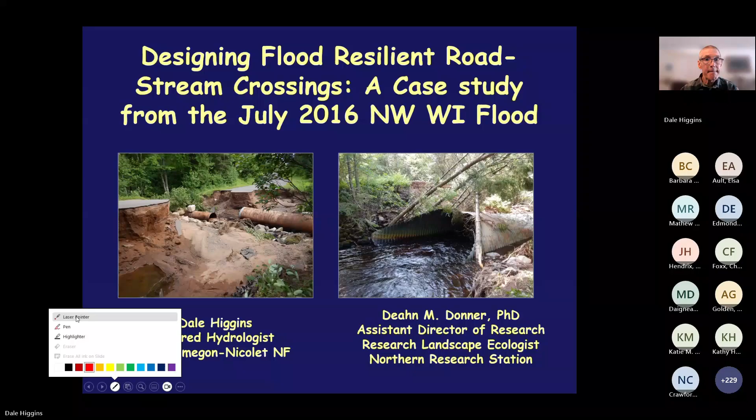Okay, so I'll get started with a little bit of background. During the flood recovery work, we were able to attain peak flood flow estimates at 26 sites. 17 of those sites were designed using the stream simulation process. Only one of those failed, although 13 overtopped. At 9 other sites where we had flood flow estimates, 5 survived and 4 failed.

The peak flood flow estimates were estimated from high water marks and then hydraulic calculations. The calculations were mostly performed using existing HEC-RAS models, which are also used to design most of the stream crossings. I'll also be talking about the flood frequencies for each of the sites, which were estimated from the 2003 U.S. Geological Survey Wisconsin regression equations.

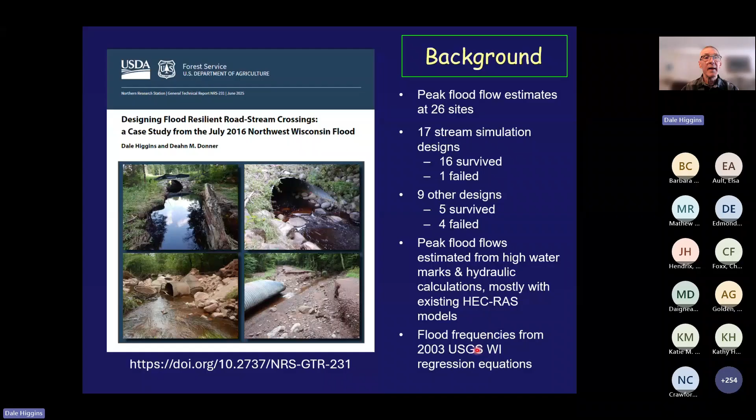And here's what Kathy showed. Here's a picture of the publication. You can download it from this website.

So the objectives today: I'd like to highlight and contrast stream simulation versus traditional culvert design, then briefly go over the results from the case study, including flood magnitudes we observed, culvert survival and failure and the lessons from that, identify how watershed characteristics affected flood response and the implications that has for future flood flows, and then apply all those lessons to designing more flood resilient culverts.

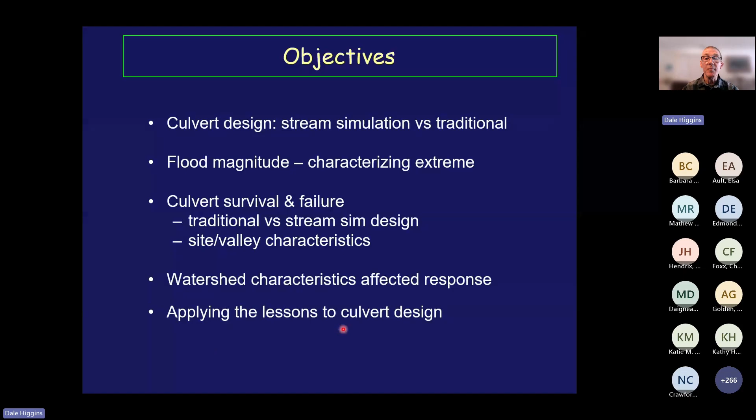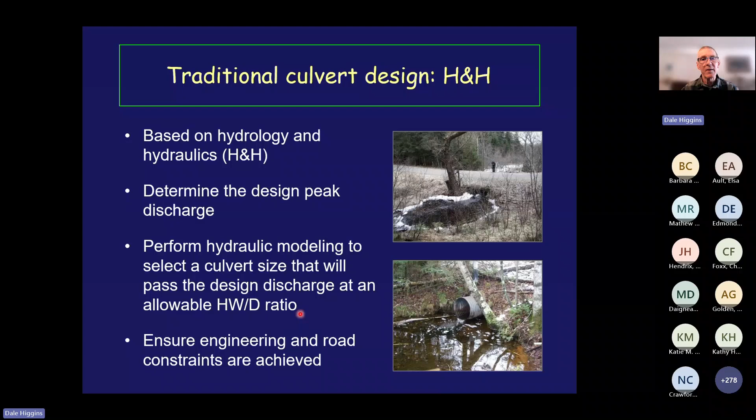Okay, start out with traditional culvert design, usually referred to as hydrology and hydraulics, or H&H. It's a process where you determine a design peak discharge, then perform hydraulic modeling to select a culvert size that will pass the design discharge at an allowable headwater-to-depth ratio. So what's a headwater-to-depth ratio?

Okay, this diagram will help illustrate it. Here's the culvert, the road fill over the culvert, and the water is flowing from left to right. The water depth at the inlet of the culvert is the headwater acting on the inlet of the culvert, and the depth is merely the depth of the pipe or opening of the structure at the inlet. So in this case, the headwater depth ratio would be 0.8. At the elevation where water would overtop the road, you'd have a headwater depth ratio of about 1.9.

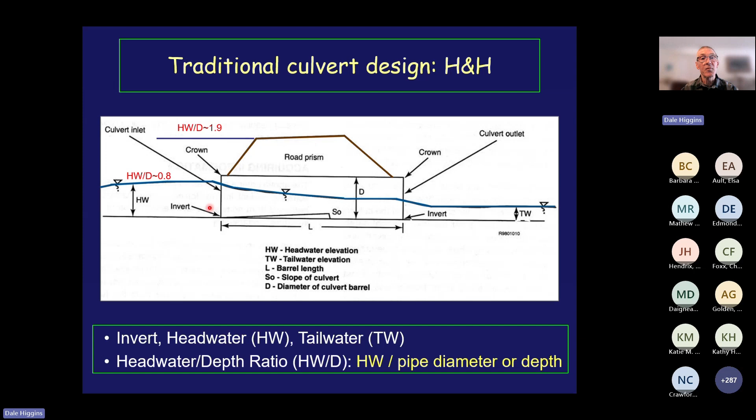Okay, first step in determining the design discharge, the hydrology part of H&H, is selecting a flood frequency for the design. There are two common terms used for flood frequency. First, annual exceedance probability, or AEP — I'll use that abbreviation some — it's the chance a flood will be exceeded in any given year, expressed as a percent, occasionally as a fraction. The other is recurrence interval, or RI, the average number of years between an event being exceeded. A lot of people forget about this average part. So the recurrence interval is just the inverse of the AEP fraction, so a 1% AEP flood is the same thing as a 100-year recurrence interval flood.

Now, when considering traditional culvert design, one thing I want to point out is design standards, if they exist, in some cases vary by agency.

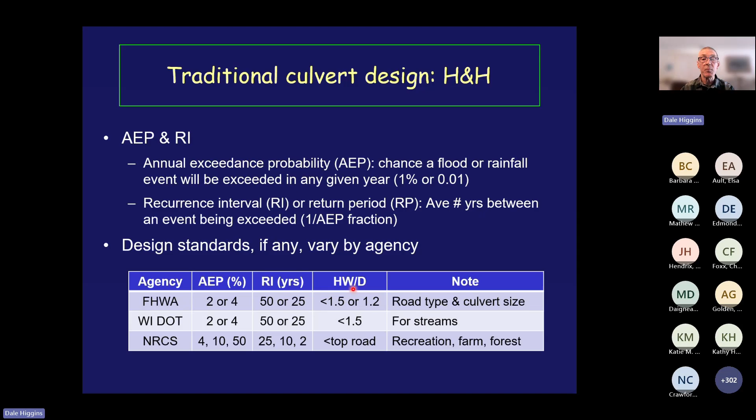So here are a few examples, typically using 2 or 4% AEP flood, which is the same as a 50 or 25-year flood. Headwater to depth ratios of somewhere between 1 and 1.5, although sometimes it can be the top of the road and a more frequent flood, depending on the agency and the type of road.

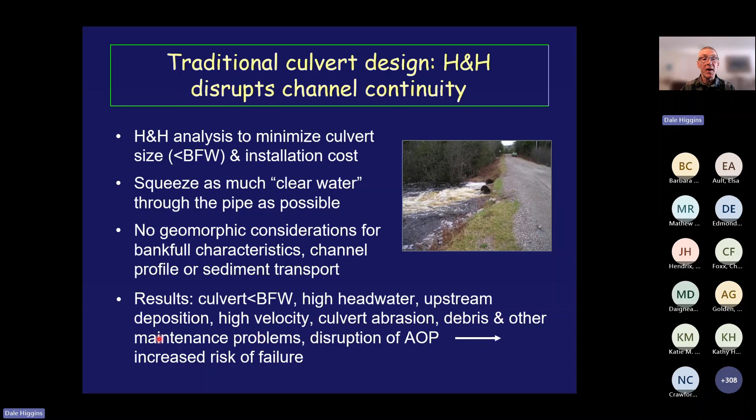So the one shortcoming I would say with traditional H&H culvert design is that it tends to disrupt channel continuity, and in a lot of respects, it minimizes culvert size and installation costs, and doesn't really consider geomorphic characteristics of the stream, channel profile, sediment, or wood transport. So what this results in is culverts less than bankfull channel width, high headwaters usually have pretty frequent floods, upstream deposition of sediments, high velocities, culvert abrasion, and debris and other maintenance problems. These all lead to increased risk of failure.

Stream simulation was initially developed to pass fish through culverts. It also results in extremely flood resilient structures. The basic concept is you design a stream channel through your crossing, and then you, figuratively speaking, wrap a structure around it.

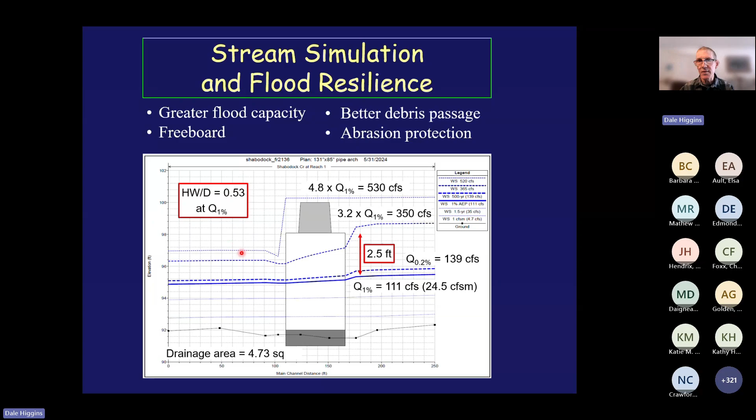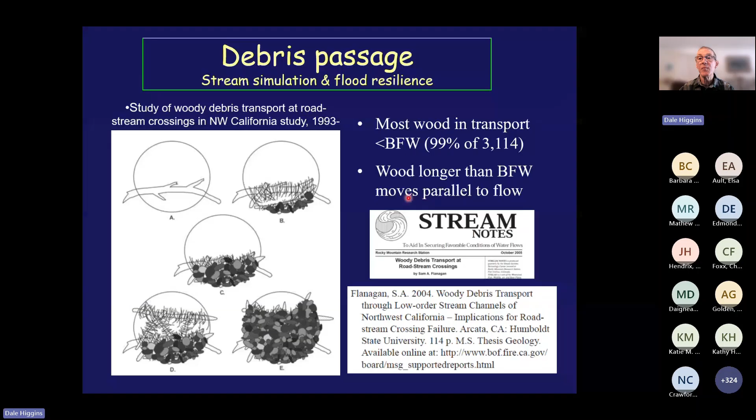Okay, next item is debris passage. A lot of structures fail because they plug with wood or other debris during a flood. So a study in northwestern California in the 1990s in forested areas found that most wood in transport was less than bankfull width, but also that wood longer than bankfull width tended to move parallel with flow, especially in the vicinity of a culvert.

So their factors for promoting wood passage are also key requirements for stream simulation. Here they go: only one opening, no headwater ponding, no constriction, in other words bankfull width or greater, freeboard, and then good alignment, especially at the inlet. So there's some illustration of that here, but especially the wood that's longer than bankfull width, you see the importance of alignment here. Your structure has a chance to pass that, not if it's not aligned at the inlet.

So the last one is abrasion resistance. Traditional culvert design has no bed in the structure, no specifics about where to set the structure, which dramatically shortens lifespan. Your failure typically occurs during high flow. So here's a pretty good example of that. This culvert here failed, was in a flood area, failed after being in the ground only 20 years. The white spots you see there may not be clear, but those are holes in the culvert. So this culvert was going to fail if the flood hadn't come in the near future anyway.

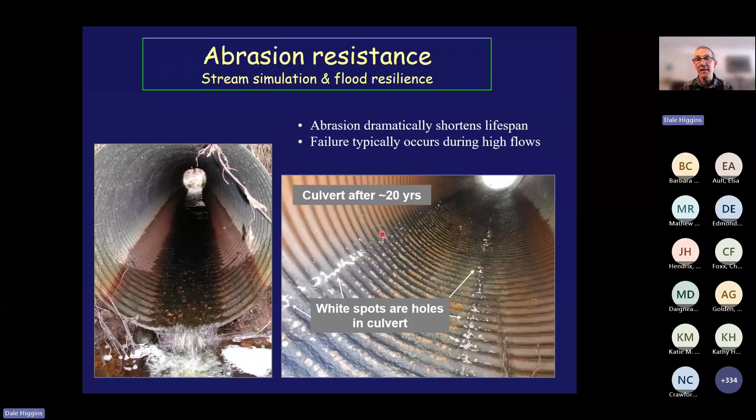Okay, and a good example of abrasion resistance where you have bed and banks in the structure, and it greatly extends structure life.

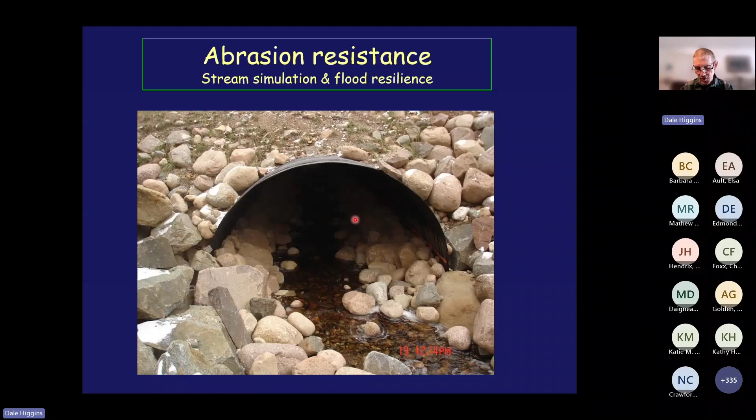Okay, next I'm going to talk about the torrential rainfall and the resulting flood.

The rainfall event started on July 11th, as I mentioned, and lasted 6 hours. Large areas of the forest got over 5 inches of rain, and the hardest hit areas were in the 8 to 9 inch range.

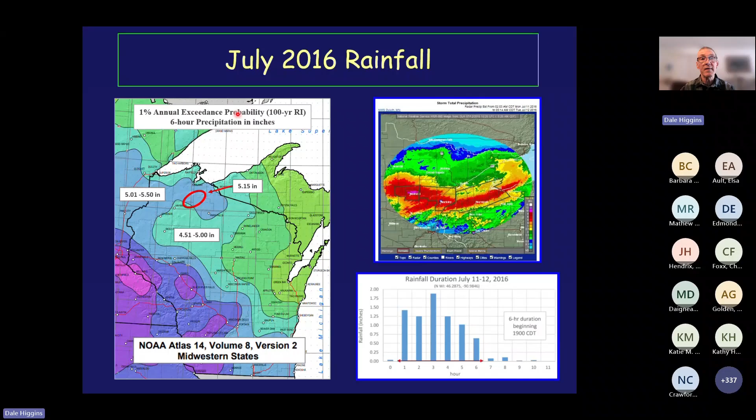If you look at the flood area here, the 6-hour 1% annual exceedance probability rainfall was 5.15 inches. The National Weather Service, after the event, did some analysis, and you'll see our flood study area right here.

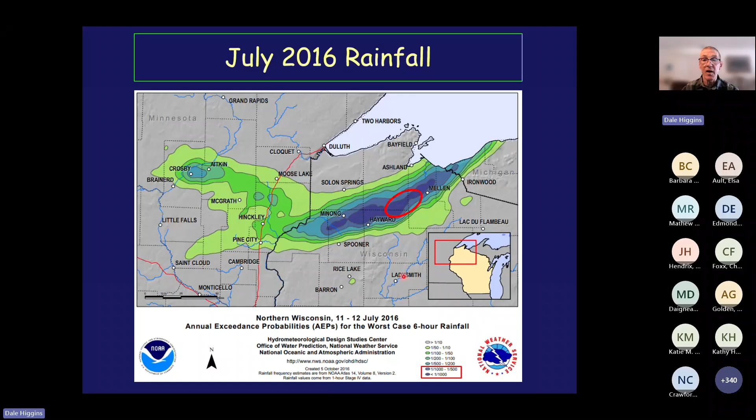They concluded that in that area the rainfall event was at least a 1-in-500-year event, and in some cases more extreme than a 1-in-1,000-year event.

So pretty extreme. This map here illustrates the rainfall within our area. This line here is 5 inches of rain, 6 inches, 7 inches, and it loops around to 7 on this side.

Then we have 8 and 8, and then 9, 9. So a large area with more than 8 inches of rainfall.

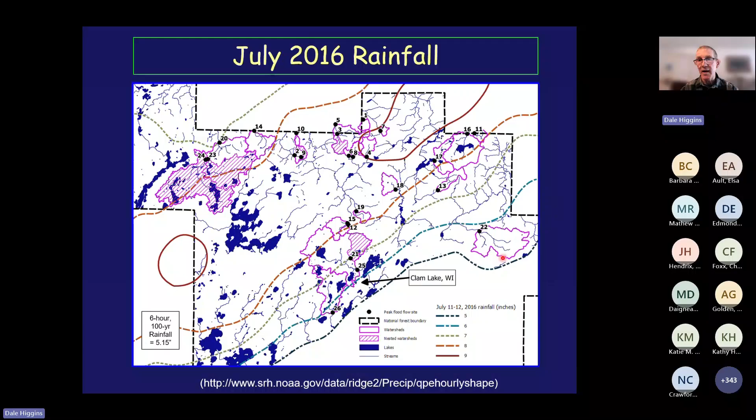The map also shows our sites, our 26 sites where we made flood flow estimates here, and the magenta lines show the watershed boundaries.

So what flood peaks were caused by the rainfall event? First, a little background: the 26 sites are watersheds. Our drainage areas range from 0.21 up to just over 20 square miles, although most were under about 7 square miles.

One of the first things we did is take these flood flows and divide them by the drainage area, standardizing it in terms of flow per unit of drainage area. We had a wide range, from less than 25 CFS per square mile to over 1,700 CFS.

Per square mile for the peak flood flow. The fact that there were differences wasn't surprising, but the magnitude of these differences is what really caught our attention.

This led us to the concept that characteristics leading to rapid runoff mean those areas are more likely to see increased flooding from more extreme rainfall in the future than areas with more attenuated runoff.

So how extreme were these flood flows? Would you believe me if I told you it was a 60 million year flood? Well, how about a 300,000 year flood? How about a 10,000 year flood?

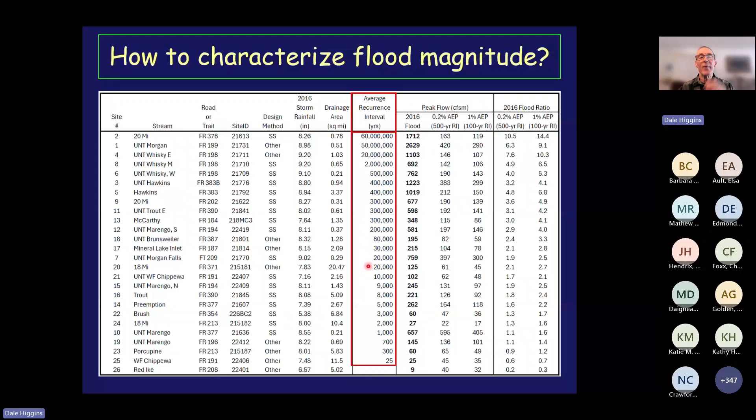Well, probably not. So where did these crazy numbers come from? Our best estimate of the flood frequency at each of the 26 sites, as I mentioned before, came from the USGS regression equations, which were used to design most of these stream simulation crossings.

These equations provide flood flow estimates for several AEPs, going from the 50% all the way up to the 0.2%, or if you want to think of it as a 500-year flood all the way down to the 2-year flood.

One thing you can do is take these points, plot them on a log scale, and generally linearize it. If you take the upper part of this line and extend it out to the 2016 flood...

365 CFS, come on down - voila, a 300,000 year recurrence interval. So aside from using this as sort of a cheap attention-getter, why present this now?

A couple of reasons: one is that it really illustrates how extreme a flood can be - how much higher it can be than the traditional discharges you use for design, which would be down here.

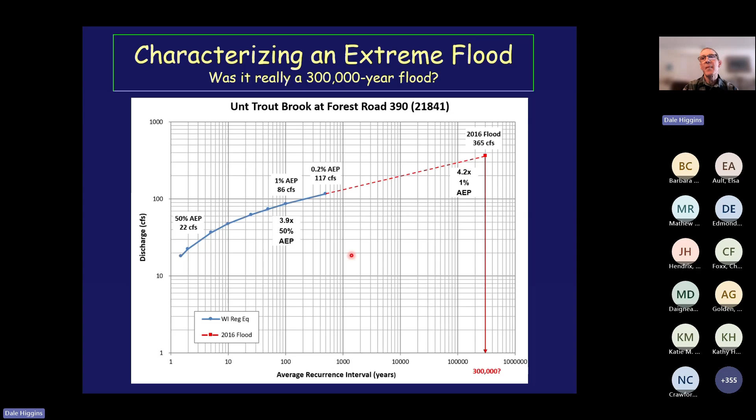How about designing a structure using stream simulation procedures, then checking an extreme flood flow to determine if you could enhance survivability if such a flood would occur? If so, would you do it at every crossing, or would you do it at select crossings?

Aside from presenting the peak flood flows in terms of flow per square mile, we also determined the ratio of the flood flow to the estimated 0.2% and 1% AEP floods. We looked at this as a simple, informative way to express the extreme nature of the flood.

I've just got one of these highlighted here. It's the ratio to the 1% flood. If you ignore the 2 highest and the 2 lowest, they're basically in the range of 1.2 to 9 times the 1% flood estimate. So pretty substantial, pretty extreme flood.

The value of having all these peak flood flow estimates, which I consider rare in post-flood studies, especially regarding road-stream crossings, is that they provide a proper perspective for the flood flows in comparison to design criteria. They also give insight into the variability of runoff that can occur across a flood area. Most extreme floods are characterized only by a single rainfall amount or possibly a nearby USGS gauge, but they don't really take into account this spatial variability that can occur.

Next I want to talk about the structures, what survived and what didn't, and why. I'm going to start off with what I'll call the other designs, which will include not only the few we have flood flow estimates at, but a lot of other structures that failed. Here are 2 examples of those.

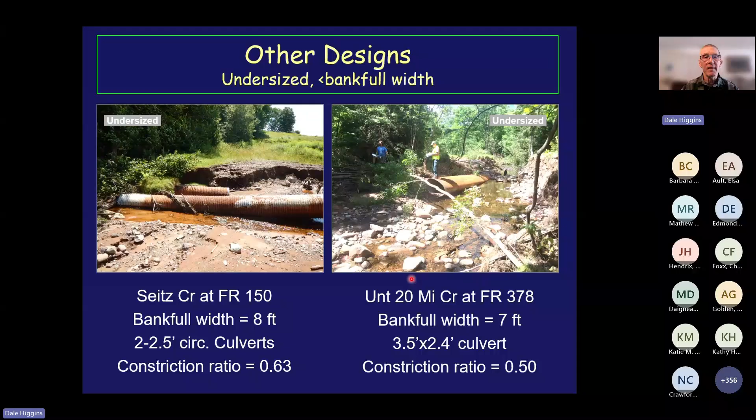Another site here, undersized at 58% of bank full width. There's a culvert there that got washed quite a distance downstream from the road crossing. We did get a flood flow estimate there, 10 times the 1% AEP.

An interesting thing about this site is that, compared to some other sites, and there were others like this too, it had a narrower floodplain, steeper channel, and a pretty high road fill. That led us to really start thinking about how those factors might affect survival and failure, because they can create greater hydraulic forces and increase the potential for failure, especially if the road overtops.

So one of the things we did is think about the floodplain or flood-prone width. You can use entrenchment, which is the flood-prone width divided by the bankfull width, to characterize how narrow or wide your floodplain is. That's a common measurement, and we use it later in the presentation.

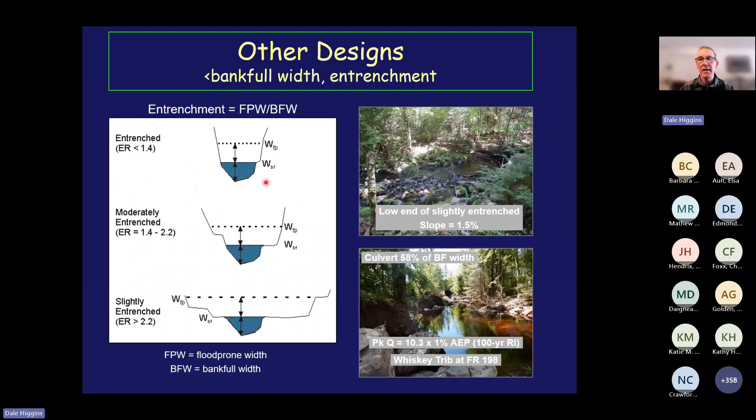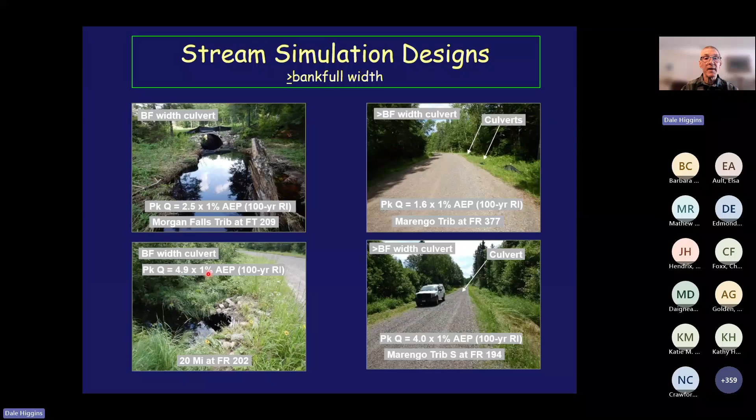For the stream simulation designs, I'll start out focusing on the value and the capacity that bankfull width structures provide. Here are 4 different structures. They all survived the 2016 flood with no maintenance required. 3 of them overtopped slightly, and they survived floods that we estimate were anywhere from 1.6 all the way up to 4.9 times the 1% AEP flood.

A couple more sites to highlight here. In addition to the bank full width, a lot of the structures overtopped because of the extreme nature of the flood. In these 2 cases, the one on the right survived a flood 4.0 times the 1% AEP flood, with really not much maintenance needed. Large or broad flood-prone areas allowed water to come over the road over a wide area, and that no doubt helped survivability.

In this particular case, the crossing survived 2.5 times the 1% flood. You can see that part of the road gravel washed off, a lot of it deposited right in the ditch, but the crossing survived. Some maintenance work was needed there, and that happened at about 5 of the sites, I believe.

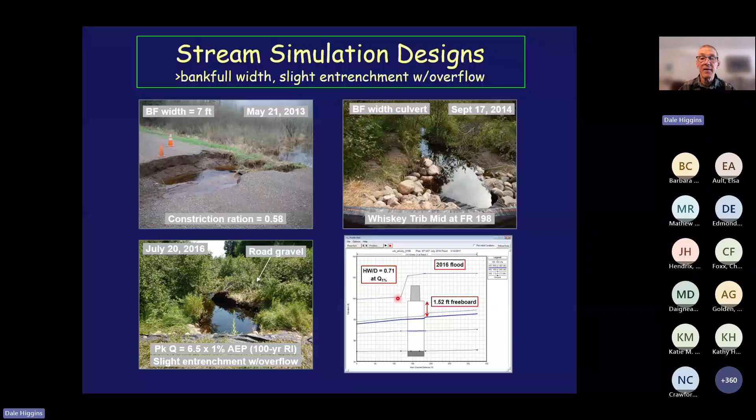Then they start to separate. Here's the 2016 flood, coming over the road off to one side. I believe part of the reason these structures are all surviving is because the tailwater can come up a lot higher, and the head difference at road overtopping is a lot less. I think that helps explain some of it.

Here is that same site in cross section. The other point I wanted to make is installing a bankfull width culvert embedded below the stream bed, you still usually have to add fill to get minimum fill over the culvert. In this case, the post-construction road created a low point off to one side of the structure. Even though the peak flood level got up to this area, the flow was concentrated over here, lost some gravel off the road, but the structure survived and the road only needed some moderate maintenance.

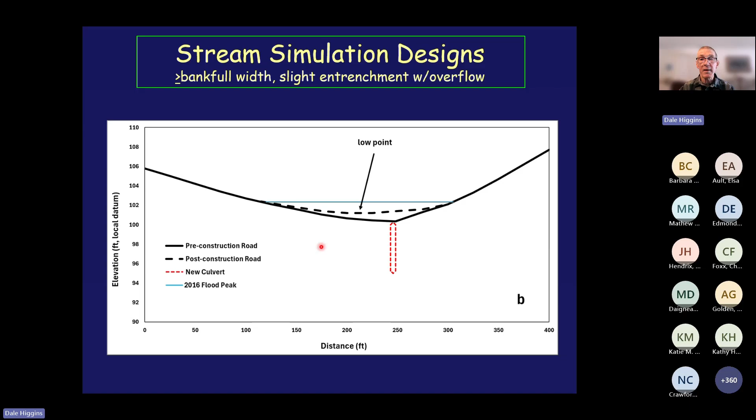With these broad flood prone areas, it's actually ideal if you can get two overflow areas. Here's another example: the pre-construction road had 3 small culverts that had failed repeatedly. This was installed in 2012, a bankfull width culvert, with the new road ramping up and over, creating 2 overflow areas. That's exactly what happened during the flood.

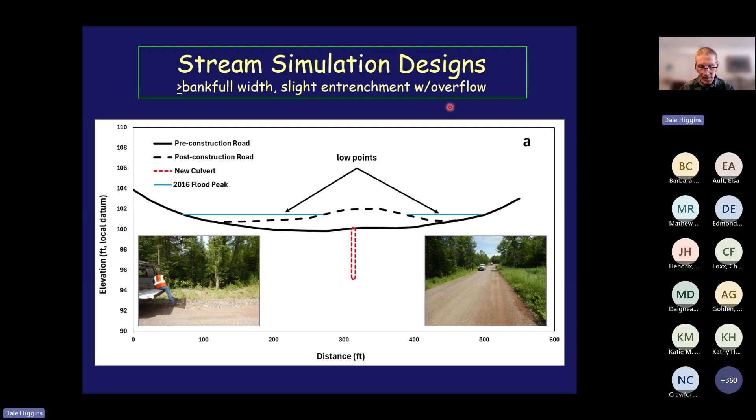Each side lost a little bit of gravel. You can see a little bit in the ditch here. Here's the vehicle down there. The town road crew had already been through and graded, so you don't see the loss of gravel off the road surface. But again, slight entrenchment and broad overflow areas with a bankfull width culvert helped these structures survive a very extreme flood.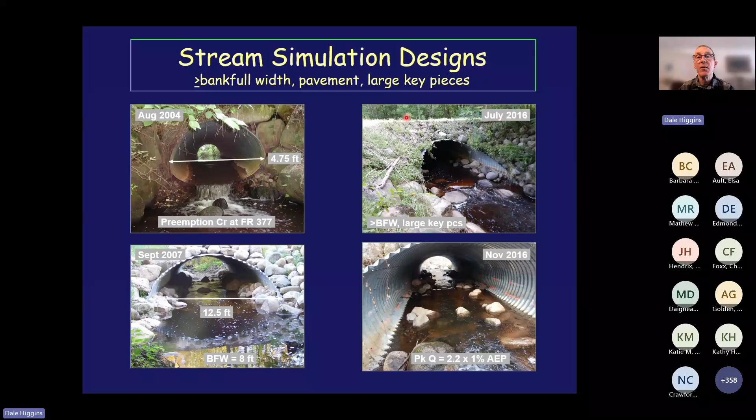The other thing I want to point out is if this happens on these more narrow floodplains, you've got to make sure there's a little bit of high ground on each side, so that when it overtops, the flow does not go down the road and take out a 1/2 mile or 1/4 mile of road. We call that stream capture, so you have to be very careful about that.

A few additional points I want to make regarding survival at overtopping. This was a stream simulation structure with a lot of capacity, good vegetation, and riprap. This was one of the more extreme floods - almost 80% of the flood passed over this structure. I think the vegetation and the road being a low volume road helped survivability.

Here's another crossing. This was not a bankfull width culvert, but it was installed in about the mid-90s. It passed about 70% of the flow over the road.

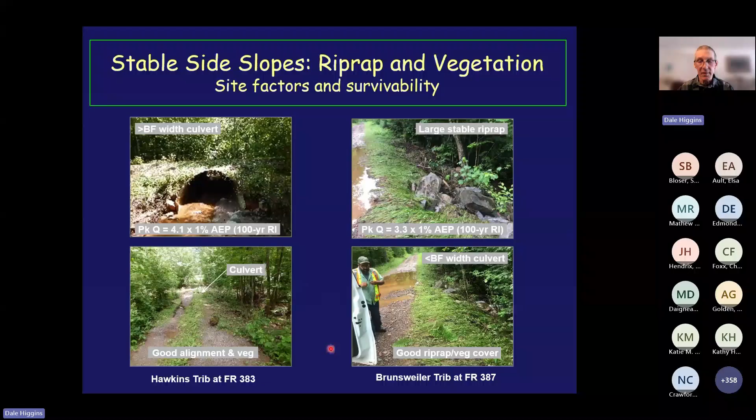You can see the dense vegetation here, large riprap. Flood flow was 3.3 times the 1% annual probability flood. No doubt those all added to survivability.

So a couple last points, just in general, our observation was that concrete structures are strong, massive, and pretty resilient, even in the face of failure.

Here's an example of a concrete bridge. Flow got over the road. Bridge survived. We did not have any flood flow estimates here. The only issue is there's a little scour under the abutment, so it needs some maintenance. But one thing that probably helped this structure is its 20 feet width, while bankfull width was 16.5 feet, so it's actually greater than bankfull width. I'm sure that aided its survivability.

This stream simulation structure replaced a culvert, a 30-foot bridge replaced a culvert. Road was paved. The flood was 2.4 times the 1% AEP. The water came actually just over the top of the railing here. You can see the log that was deposited. It's a wooden bridge, but it's set on concrete footers tied into bedrock. This is an area where there's shallow bedrock.

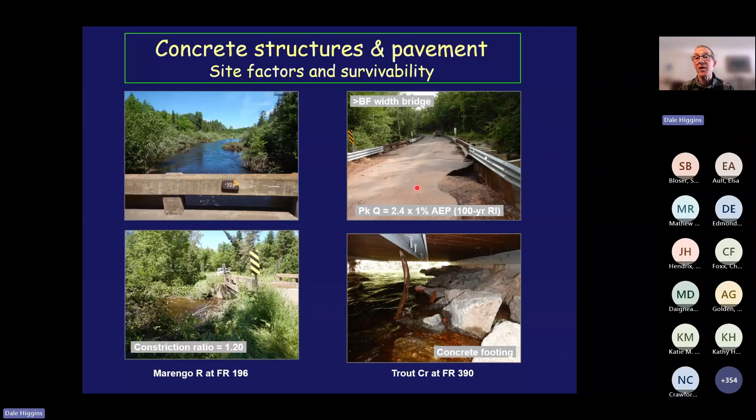Amazing survivability. The road actually held in place pretty good by the pavement, although a little bit was lost there.

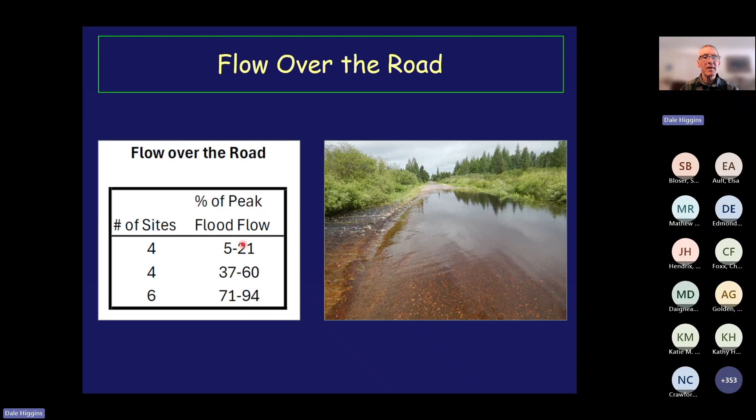So a few words about, I mentioned we had 14 stream sim sites with flow over the road. There was a lot of variability in the amount of flow. Four sites had a minor amount, I'd say in the 10% range. Another four sites had a moderate amount of water from this extreme flood going over the road, around 50%. And we had some in that 70 to 80% range. A lot of it correlated with the extremity of the flood, but not entirely. A lot had to do with the individual site characteristics.

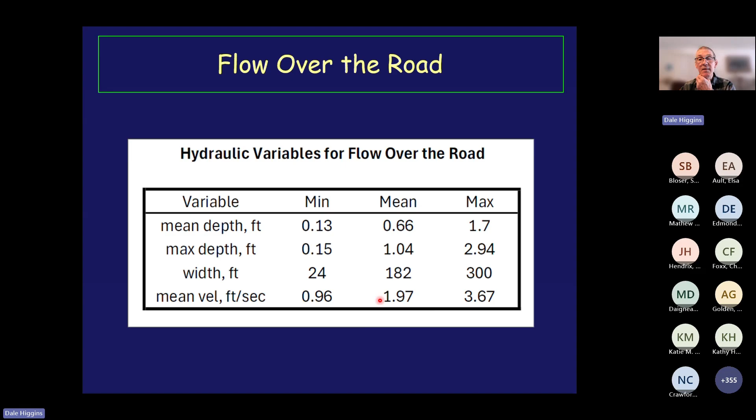This is some of the output from HEC-RAS for flow over the road. Mean depth two thirds of a foot, but quite a bit of variability depending on the site. Maximum depth of a foot, again with variability. Average width 180 feet, a wide range again. And then mean velocity is about 2 feet per second, varying from about 1 to over 3.5.

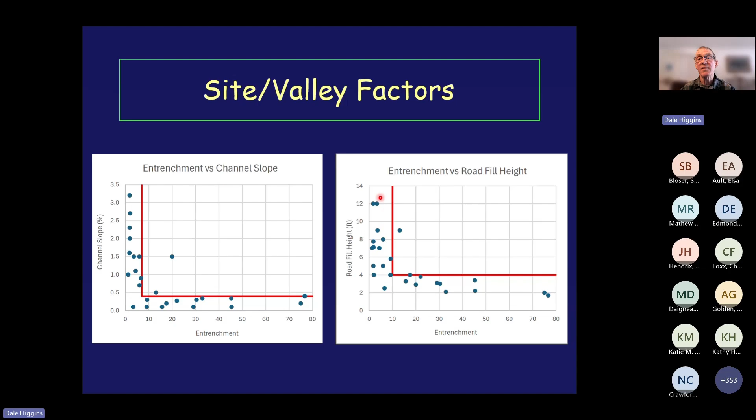The other thing I mentioned earlier is how these three factors tend to interrelate, and the graph provides a good example. Looking at entrenchments greater than 7, the slopes are pretty much from 0.1 to 0.4%, which makes sense - these are broad flood-prone areas, predominantly a stream flowing through a wetland. As entrenchment starts to get less, our slopes go from 0.5 to 3%. If you get down to entrenchment of 2, we have our 5 highest slopes ranging from 1.5 to 3.2%. With regard to road fill, it's the same pattern - entrenchments greater than 10 is where all our 2 to 4 foot fills are, so broad flood-prone wetland areas with low road fills. As entrenchment gets less, we start seeing fills of 4 to 8 feet, and if it gets to less than 5 or 6, we're up in that 8 to 12 foot range.

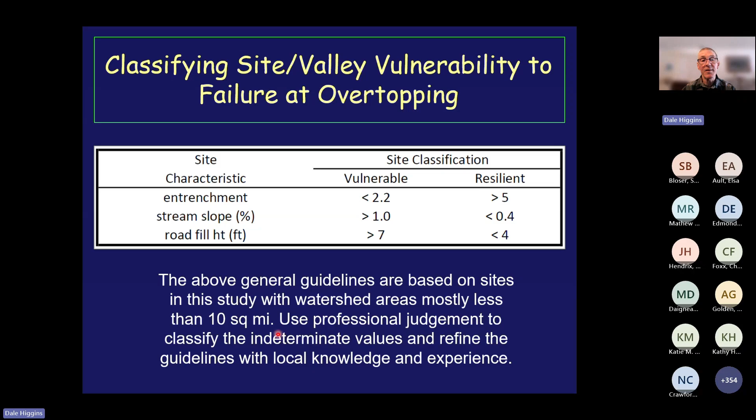So we have a few general guidelines here for classifying a site's vulnerability, especially at overtopping - just two broad classes, but with a gray area in between. These are general guidelines based on our sites and observations and data. Keep in mind they're mainly for drainage areas less than 10 square miles. We suggest using professional judgment for classifying indeterminate values, and refining these things with your own local knowledge and experience. So to summarize, we've covered the survivals and failures, focusing mainly on survival.

Stream sim design provides substantially greater flood capacity. None of the sites became plugged with debris, and that aided their survival. Broad flood-prone areas provided substantial flow over the road to these extreme floods in many cases. At some sites, the road ramped up over the structure, allowing overflow on one or both sides rather than directly over it. Construction and maintenance practices that provided good erosion protection certainly appeared to help survival at overtopping.

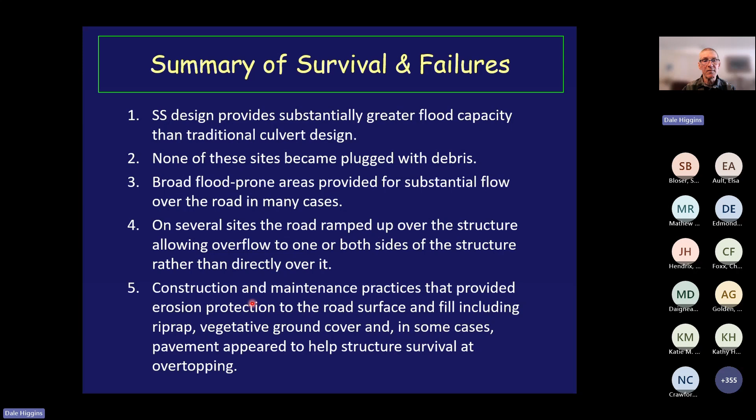So I'd like to reiterate the substantial differences in watershed response drove home the point that watersheds producing more rapid runoff are likely to see greater increases in flood flows from extreme rainfall in the future than those that tend to attenuate runoff. We wouldn't have been able to observe those broad differences if we hadn't been fortunate enough to get so many peak flood flow estimates from the flood.

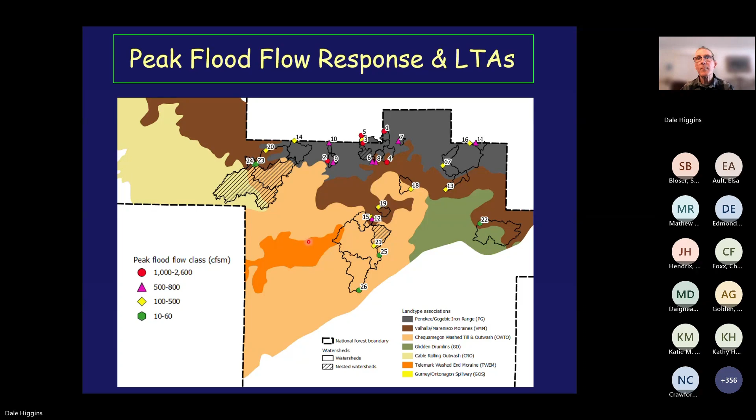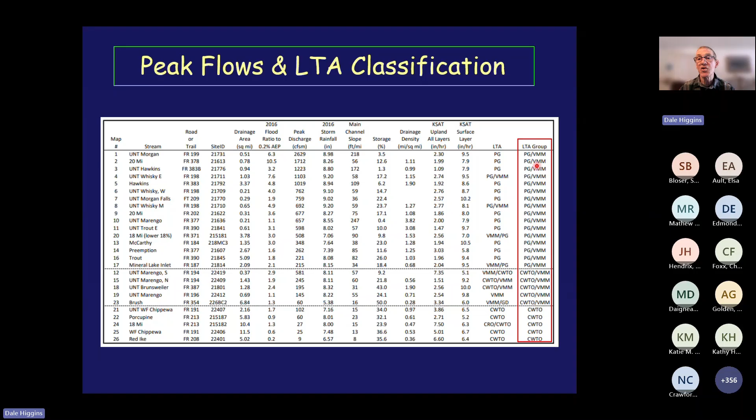So let's look closer at LTAs. To do that, we classified each watershed area by its dominant LTA. Some were a complex of two, and due to lack of replication, we combined them into three relatively similar groups, then performed some statistical analysis.

The mean differences for the three groups were significantly different, but we also had rainfall estimates for each watershed, and they differed by almost an inch, from 7.5 up to 8.5 inches. So using regression analysis of peak flow on rainfall for each group, we used that as a covariate to adjust the mean peak flows and factor out the effect of rainfall. There was still a statistically significant difference, and the eye-popping thing to me is the means ranged from 50 CFS per square mile to 250 to 550.

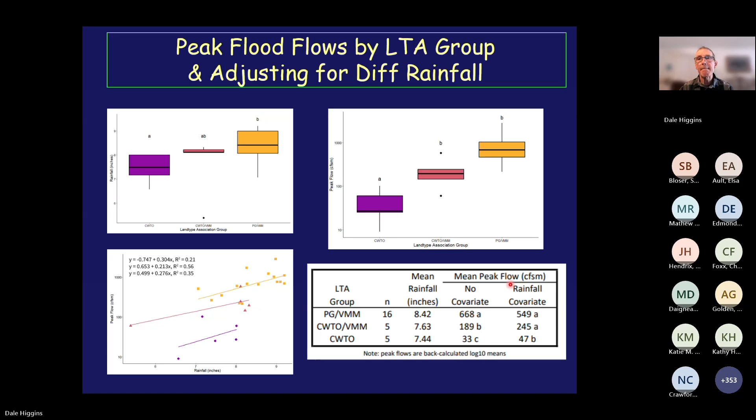Related to that, we felt LTA does a good job characterizing flood potential and runoff. A good example is two sites with nearly identical rainfall: one site in that Cable Rolling Outwash had 8 inches of rainfall and 27 CFS per square mile, while a site in the Penokee-Gogebic area had 8.08 inches of rainfall but 220 CFS per square mile — more than eight times greater for nearly the same rainfall. So much flashier, much more responsive.

So it was clear to us that watershed characteristics, as characterized by LTA, had a strong correlation with flood response. The next question was: how do we extrapolate that knowledge to classify the vulnerability or resilience of areas to increases in flood flows from more extreme rainfall outside of the flood area?

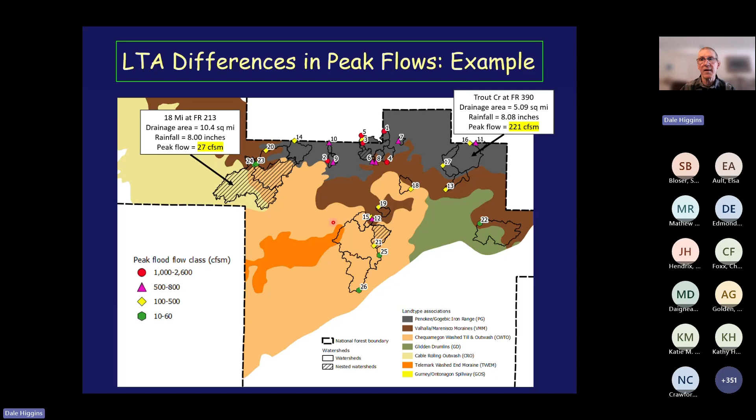Okay, so to pursue that idea, we looked at 4 variables, and 3 of these are used in the USGS regression equations. We regressed main channel slope on peak flow - significant relationship. Storage on peak flow - significant, declining relationship. Saturated hydraulic conductivity - statistically significant relationship.

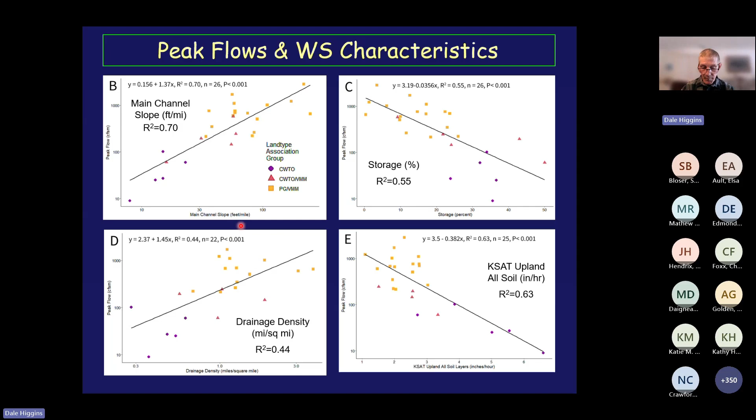And then we also used drainage density. All were significantly related, so we thought we could use a few of these variables to help classify LTAs. But we also looked at how they interrelated.

This led us to the idea that we could use storage, drainage density, along with the LTA descriptions and the U.S. Geological Survey gauge data, to classify the vulnerability of land type associations in Wisconsin to increases in flood flows from more extreme rainfall. So the steps we used are outlined here.

I'll go through them briefly. Step one, determine storage and drainage density for each LTA in Wisconsin. It's a GIS exercise: get the lakes and hydro layer, lakes and ponds, wetland layer, determine storage in percent for each LTA, overlay the stream layer with each LTA, determine drainage density in miles per square mile.

We obtained USGS gauge locations and their associated 1% flood flows from their frequency analyses - it was a shapefile of points. We only used sites with drainage areas less than 75 square miles that were unregulated, so more natural flood flows. We also divided flood flows by drainage areas to look at unit area flood flows, and plotted them on the map.

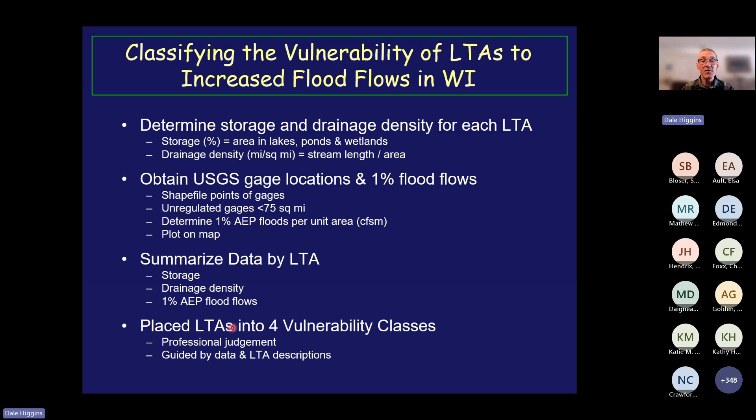Summarize the data - basically in a spreadsheet, summarize them, calculate some indices, sort them, and then basically use professional judgment guided by the data and LTA descriptions. We placed each LTA into one of 4 vulnerability classes.

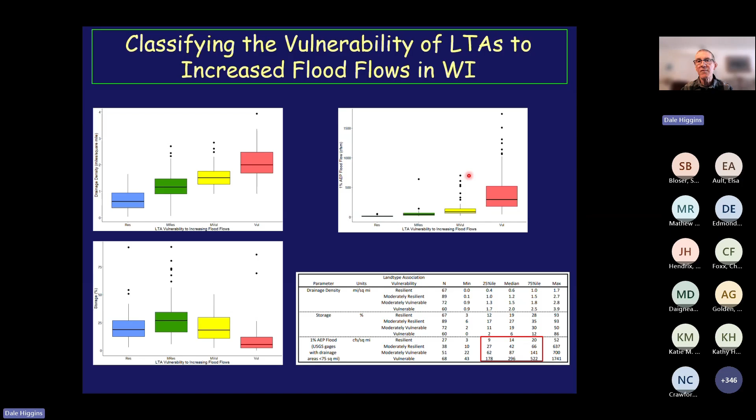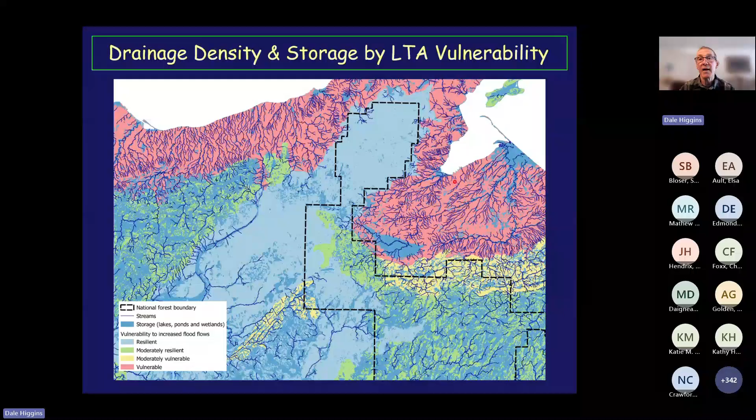Less storage in these groundwater recharge areas. The green, moderately resilient, has a little bit higher drainage density but lots and lots of storage in these areas. Then you move into moderately vulnerable - this is that Penokee-Gogebic area, with higher drainage density and less storage, another piece of bedrock-controlled topography there. And then the vulnerable areas have very high drainage densities and less storage on the Lake Superior clay plain.

So to try and wrap this up - what is our advice or conclusions? Use stream simulation as a baseline for flood resiliency, then use the LTA vulnerability classes, if you have them.

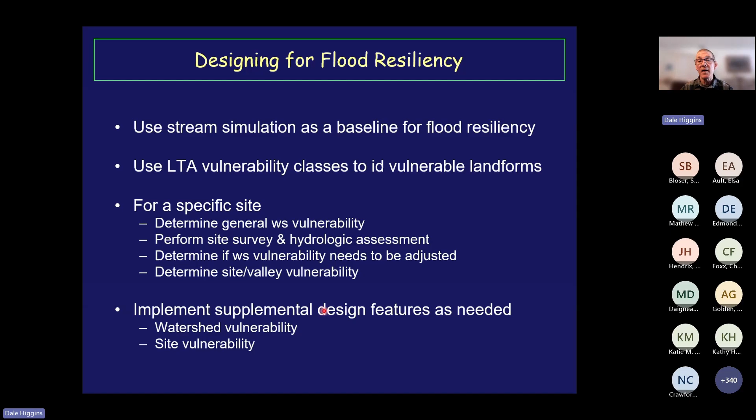If not, you can go down to a specific site you're going to design, do your site survey, hydrologic assessment, stream sim design, and then determine from your hydrologic assessment whether the vulnerability needs to be adjusted. Or if we don't have it, can we estimate a vulnerability? Use your survey data to determine your site valley vulnerability, and then use those two things to determine if, depending on the vulnerability, you want to supplement any design features for your stream simulation design.

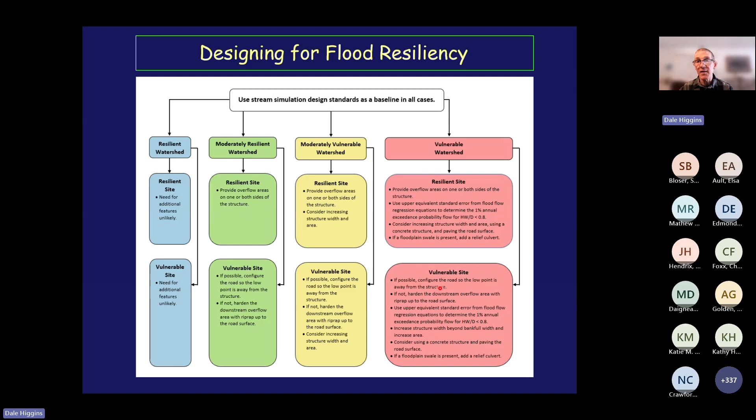So with that, I'm hoping to end. I just want to point out a few references. This is the stream simulation design guide. It's approximately 600 pages, just packed with all kinds of good information on stream simulation design.

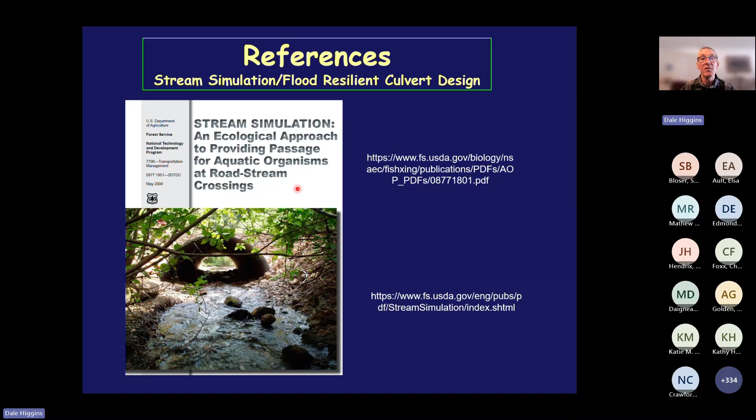Either one of these, you could cut and paste into your web browser and you should be able to download that. And then I have a couple other references I want to point out. Here is the Wisconsin Initiative on Climate Change Impacts, which has working groups. The infrastructure working group had a stream crossing committee that produced a flood resilient culvert design primer for Wisconsin. It's about 10 pages, a nice summary, and it's basically a stream sim summary, but focusing on the flood resilient aspects and some specifics like low gradient streams in Wisconsin.

So to download these resources, you can go to the WICCI Infrastructure Working Group here, and then page down, there's a link that says Flood Resilient Road Stream Crossings. That'll open up a document that has links to each of these.

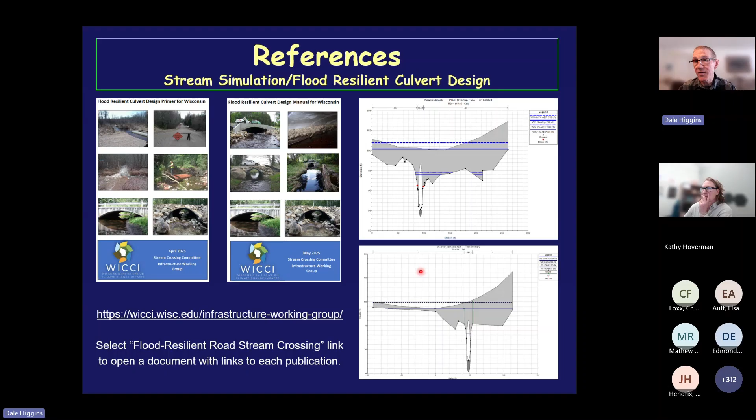All right, so first one: how often are terrestrial wildlife considered in the designs of AOP connectivity projects? Any low-hanging, cost-effective design recommendations for being able to improve terrestrial and aquatic connectivity? So my answer to that is, really the design is an interdisciplinary process. Like in Forest Service, I was a hydrologist, working with civil engineers, fish biologists, recreation people, and other hydrologists. So some of that depends on the setting and the issue. If I can go back very quickly, give me a few seconds here.

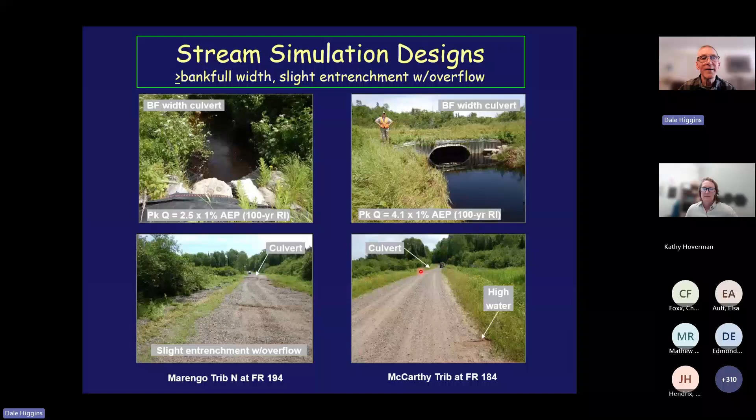So that was actually filled in with fine gravel, and what you see now are organic deposits over bank flows with organics depositing there. There was a case where you didn't want to send animals up over the highway and make it a killing field, so we needed to provide terrestrial passage. I'd say it varies from structure to structure, depending on traffic, height of fill, wildlife concerns and all that, but it certainly should be considered. It's a good question.

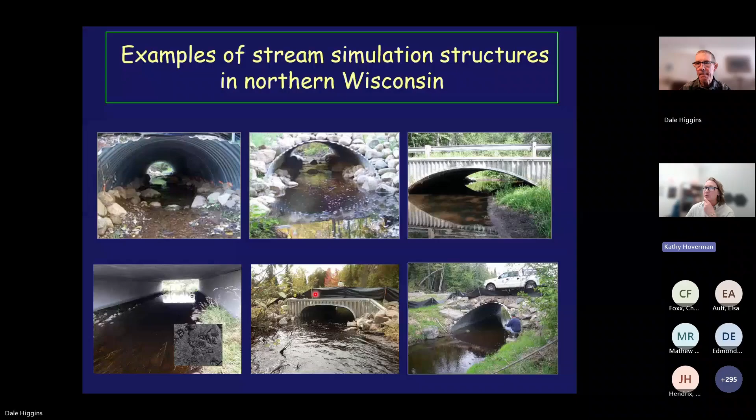There is maybe time for one more question here, and the next one is about your peak flow spreadsheet. Is the peak flow spreadsheet used often, or is it just for this study? It's a good detailed snapshot of flooding.

That's why I like to do the flood flows per unit area, because it gives you some sense of how flashy the streams are. One thing you do have to be careful with unit flood flows, though, is that as drainage areas increase, flood flows will go down because of attenuated flow and all that. But if you keep it to a fairly narrow range like we did here, I think you're okay. So that's one thing to think about if you're looking at a gauge that's 1,000 square miles and you have a 2 square mile watershed, especially with peak flows.

Average day flows maybe not quite so bad. So I don't know if I answered the question, but anyway. I think that's great. Hey, let's scoot this one last question in. I think it's a really interesting one.